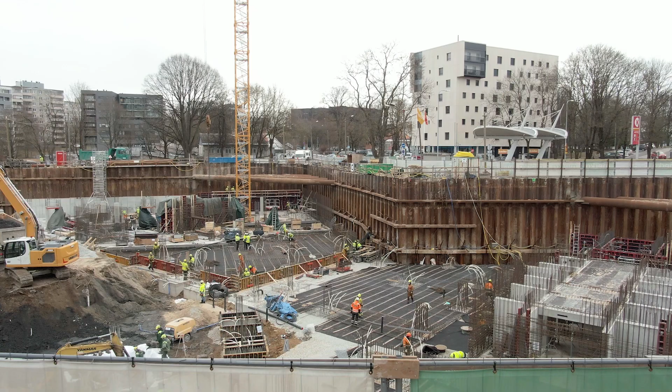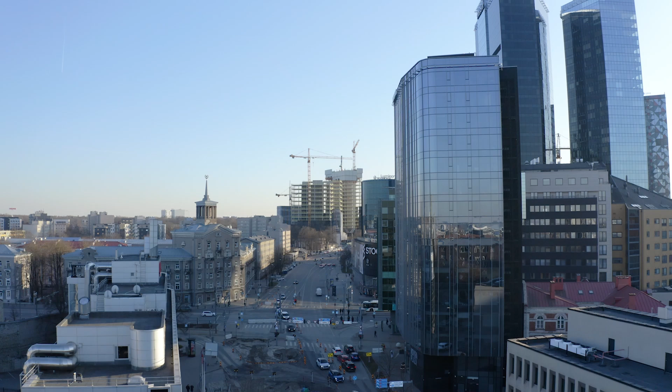Did you know that the construction industry, compared with other industries, has been one of the slowest at adopting innovation because of the characteristics of construction projects? First of all, construction projects involve a lot of different stakeholders: builders, subcontractors, suppliers, architects, homeowners. In addition to that, one of the influential parties is the local state, under whose regulation the whole construction needs to be done. There are a lot of rules in construction. On one hand, it can have an inhibiting effect on innovation, but on the other hand, it can lead to major changes.

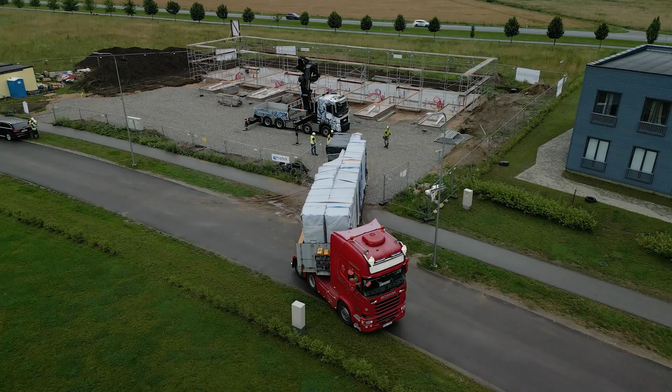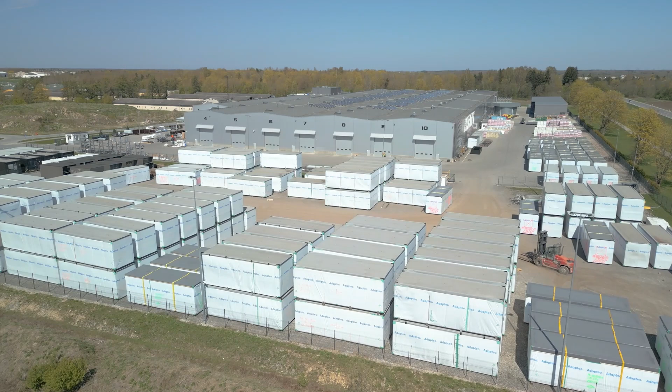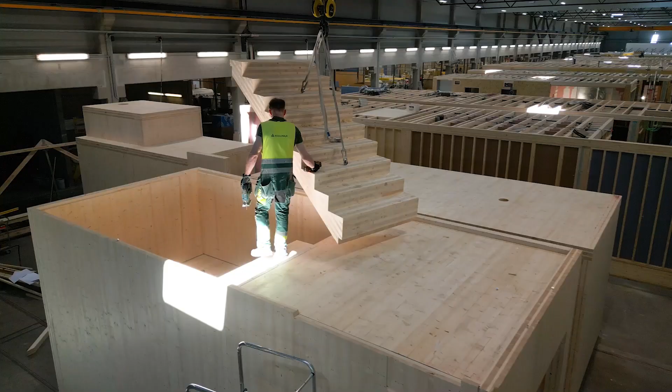Today we are witnessing the coming of a new construction era, where extensive changes have been happening due to technological developments and acknowledging the need for resource efficiency. While traditional construction involves assembling various materials on a building site, with workers engaged in numerous tasks such as laying bricks or installing windows, an alternative way is to build industrially. Industrial house manufacturing is similar to car manufacturing. All the house building components like walls, floors, and much more are produced in a factory rather than on-site.

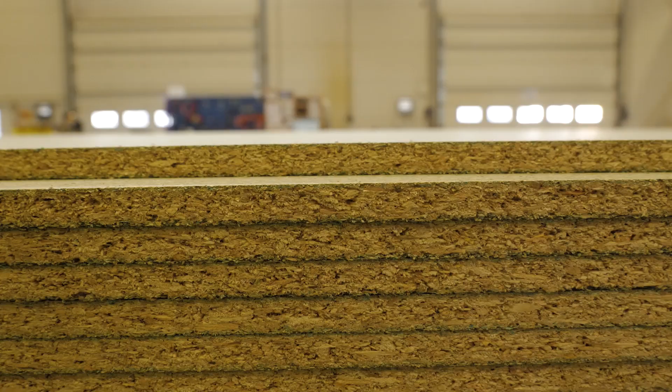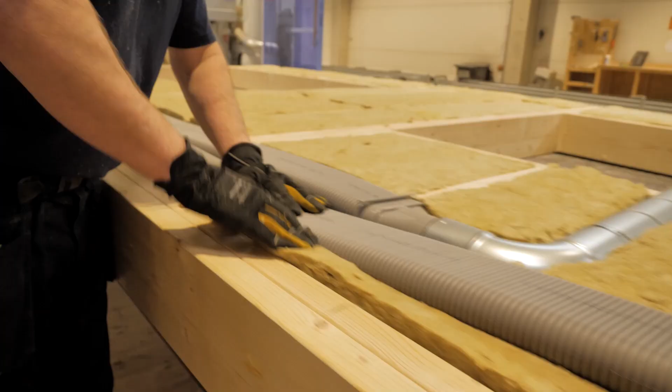This approach presents several benefits that make it an attractive choice in contemporary construction. Below, we explore more closely the key reasons why producing buildings in a factory is more reasonable and effective than conventional on-site construction. Industrial manufacturing, also called prefabrication, offers several significant advantages in terms of speed and quality, which are essential in construction practices. Factories provide a controlled environment where external factors like weather and temperature do not disrupt the construction process, as the works are happening indoors. This eliminates delays that might be caused by rain, snow, or extreme temperatures, which are common issues in traditional construction projects.

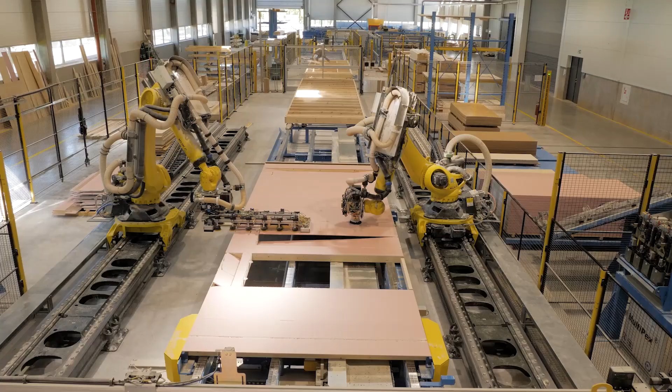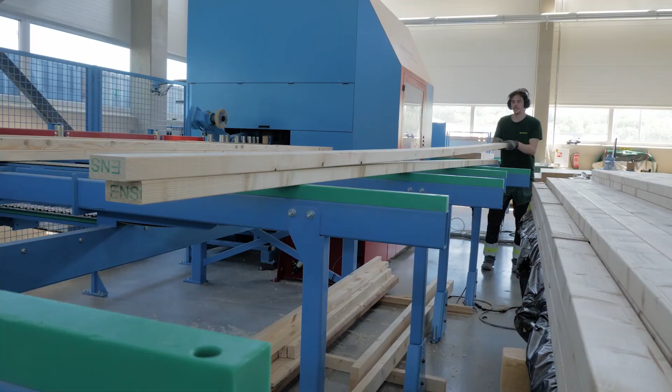The use of advanced machinery in factories allows tasks to be completed with a high degree of accuracy. This precision reduces the chances of errors that can occur on construction sites due to human factors, leading to a higher overall quality of the finished product. Moreover, components produced in a factory can be standardized, meaning they are made uniformly. Standardization helps to make quality more reliable as the components are made the same way every time. As well, uniformly produced components fit together easily, speeding up the building process since there's less room for errors.

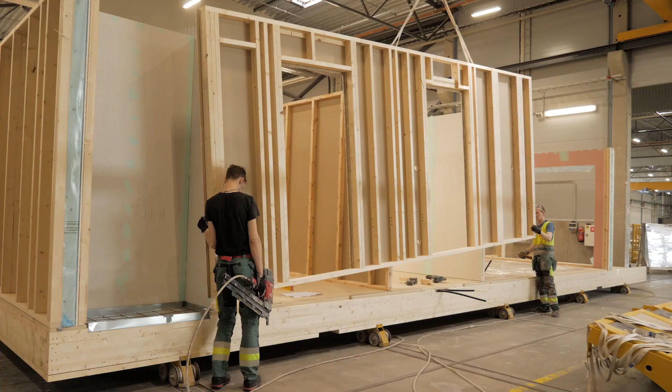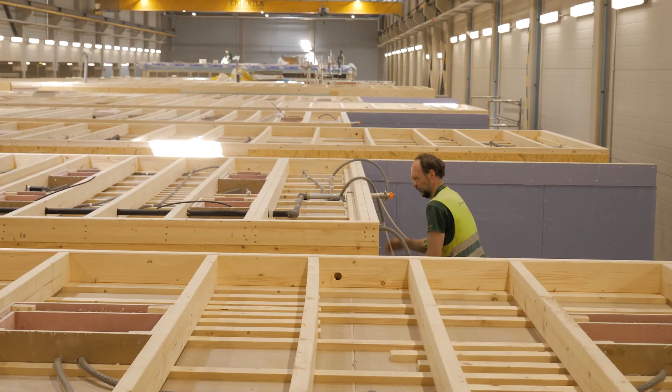Efficiency and speed are significantly improved in factory-based construction. Building houses in a factory environment can be much faster because multiple processes can happen at the same time. For example, while the wooden frame for a building is assembled, another element can be painted and another can be wired for electricity. Simultaneous work shortens the overall construction timeline. Factories are designed to optimize the flow of work. The movement of materials and the order of tasks are carefully planned to ensure maximum efficiency. This organized approach speeds up the construction process, resulting in a quicker and more reliable building method.

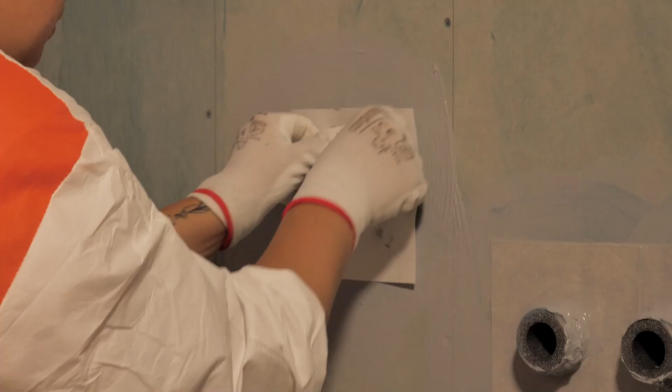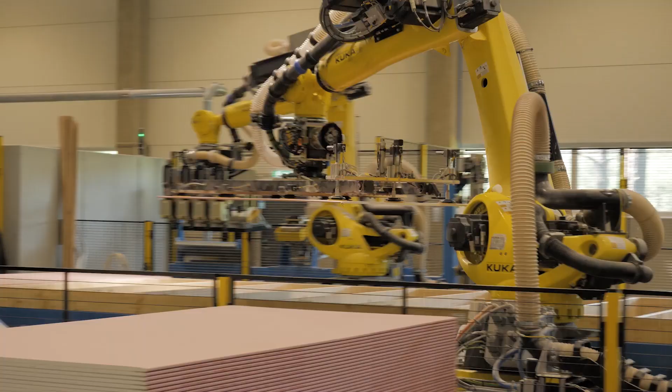Industrial manufacturing allows us to provide cost-effective solutions. With standardization, it's possible to cut costs not only in production, but also in design works. Automation also helps to raise the efficiency of factory production and reduce the need for workforce. Additionally, factories can purchase materials in bulk, making the final product more affordable. Furthermore, the precision with which materials are cut and assembled in a factory setting leads to significantly less waste, reducing costs and contributing to more sustainable construction.

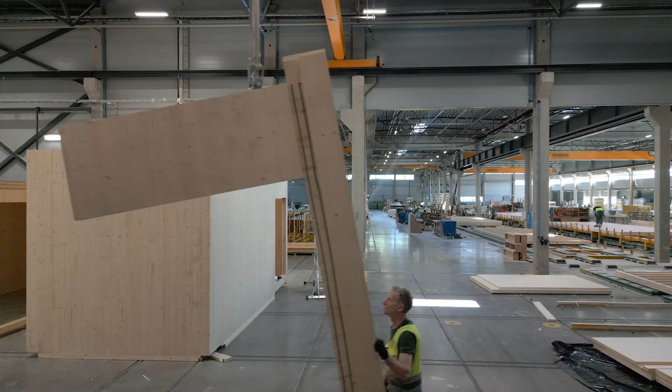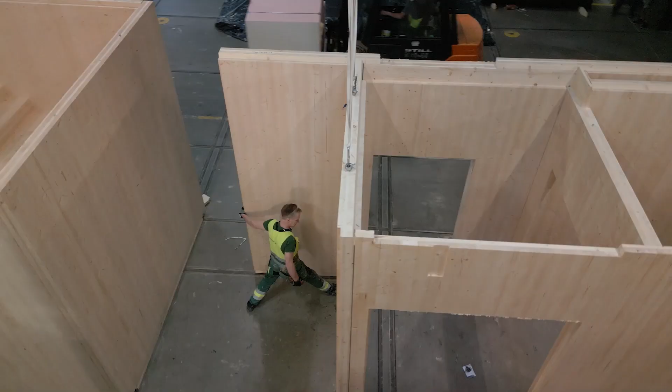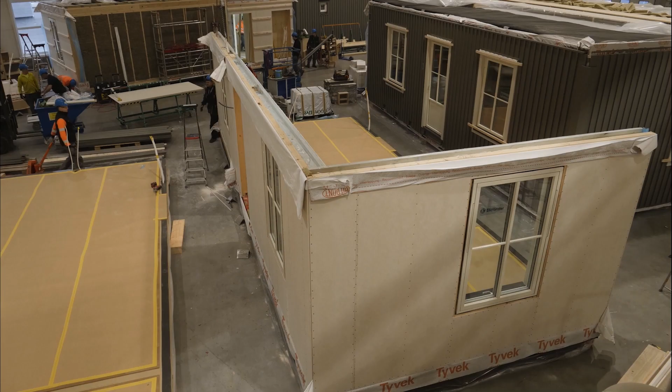Sustainability and environmental benefits are integral to modern construction practices. Houses produced in factories can be designed using advanced techniques and materials that enhance energy efficiency, leading to reduced overall energy consumption of the building. The centralization of production in factories also helps to lower the carbon footprint by minimizing the need for extensive transportation of materials and products. Moreover, factories are better equipped to manage waste efficiently, including recycling materials, contributing to a more sustainable and eco-friendly construction process.

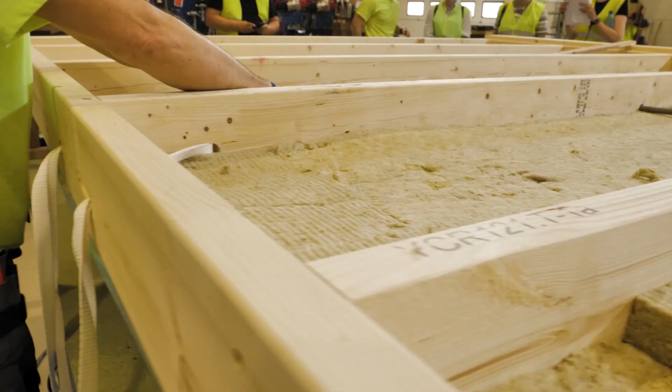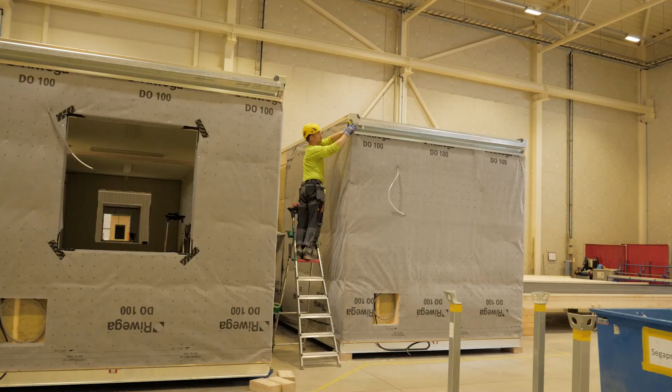Safety and working conditions are significantly improved in a factory setting, as there are fewer risks related to working at heights, handling heavy machinery, or dealing with unpredictable weather conditions. These factors are common hazards on construction sites, but are largely mitigated in a controlled factory environment. Prefabrication represents a significant shift in innovation in the construction industry, offering numerous advantages over traditional on-site building methods. The ability to produce homes with greater quality control, speed, cost-effectiveness, and sustainability makes this approach increasingly relevant in today's construction landscape.

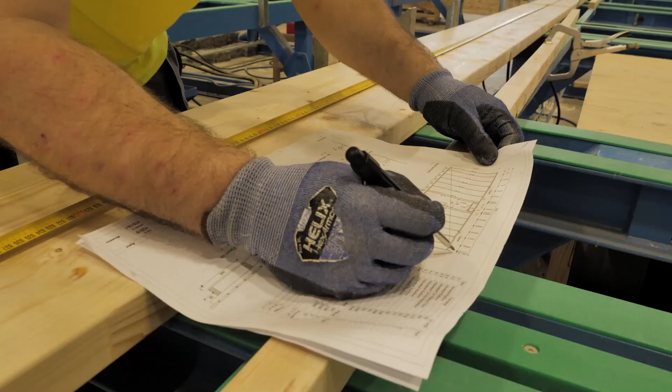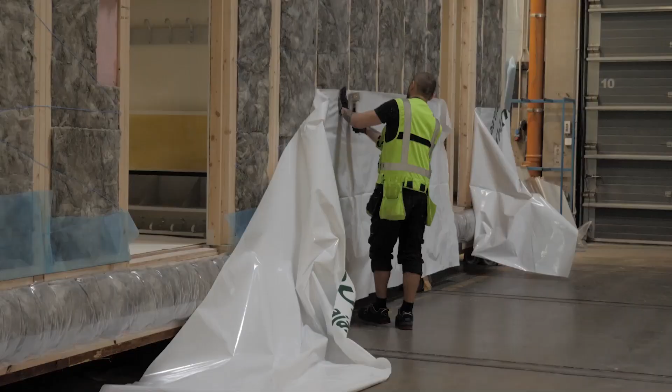In the world of construction, efficiency and speed are key factors. Let's compare how the industrial construction process differs from traditional on-site construction. In industrial construction, materials and products are first gathered and brought to a house factory. Then, the production process takes place. For example, a 6-story modular building with 60 apartments can be produced in just 1.5 months, with the modular units reaching up to 90% completion before being transported to the site. Once the factory work is done, the partially completed building is transported to the construction site. The erection of the building can be completed in just 4 months. In total, the industrial construction process for a 6-story modular building takes approximately 5.5 months.

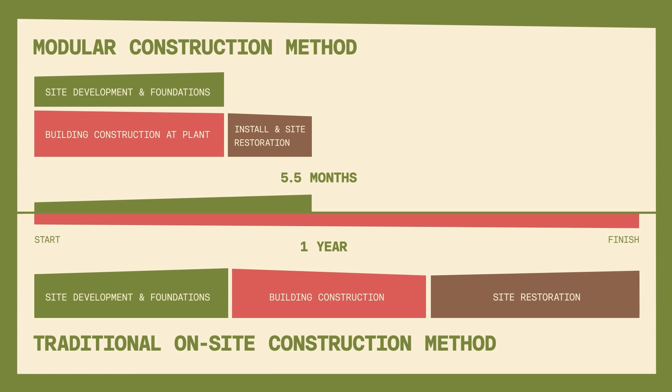When comparing it with traditional on-site construction, the entire construction process takes place on-site and requires a whole year from start to finish. As you can see, industrial construction, with its use of prefabrication in a factory, is much faster, sometimes even twice as fast when compared to traditional on-site construction. This is the reason why efficiency makes industrial construction an attractive option in the modern building industry.

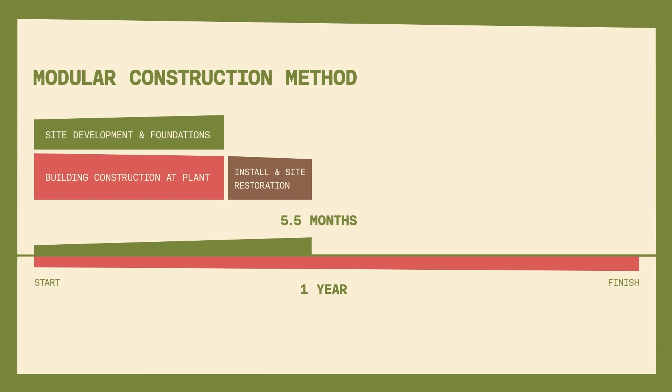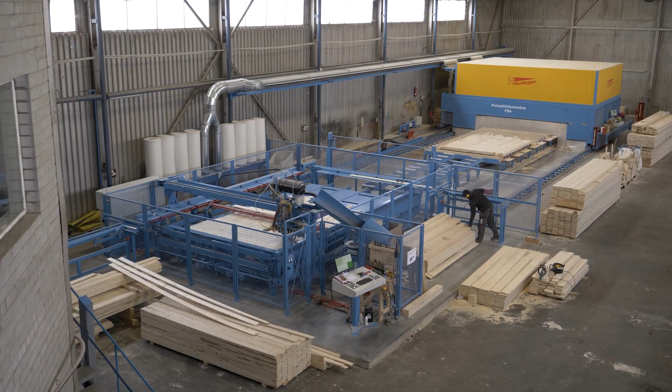House factories operate as complex ecosystems, where various departments and processes work together seamlessly to ensure the smooth production and delivery of building components. This integrated approach is necessary to meet the diverse demands of each project, from initial sales and estimation to final assembly, logistics, and warranty services.

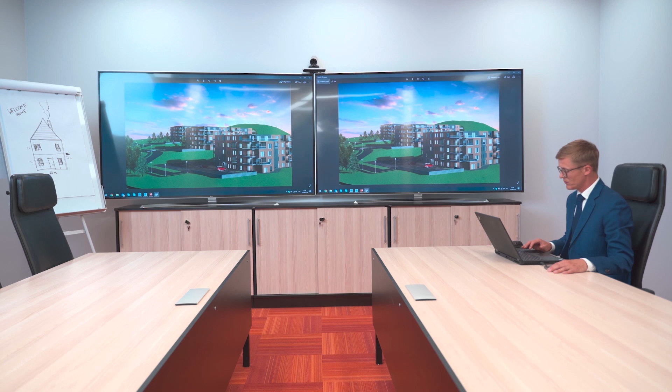By bringing together multiple disciplines such as design, procurement, production, quality control, and project management, house factories create a streamlined workflow that allows for efficient and high-quality production in a controlled environment. Each department and process within a house factory is interconnected, with the success of the entire operation depending on effective communication, precise planning, and coordinated execution.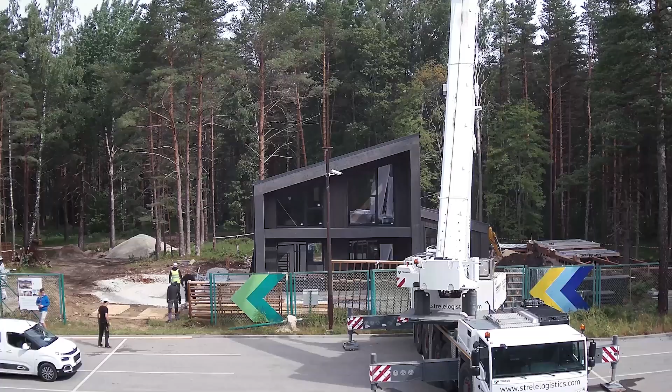For example, the project manager must work closely with procurement to ensure that all necessary project-specific materials are available on time, while the production team relies on accurate designs and material availability to produce components without delays. Meanwhile, project managers oversee the entire process, ensuring that every stage aligns with the project's scope, budget, and timeline.

This approach, supported by advanced technology and rigorous quality control measures, ensures that projects are delivered on time, within budget, and to the highest quality standards. It allows house factories to efficiently produce custom solutions tailored to specific client requirements. The ability to perform most of the construction in a factory setting, rather than on-site, minimizes risks, reduces waste, and improves overall efficiency. Prefabrication sets a high benchmark for sustainability, safety, and innovation in the construction industry.

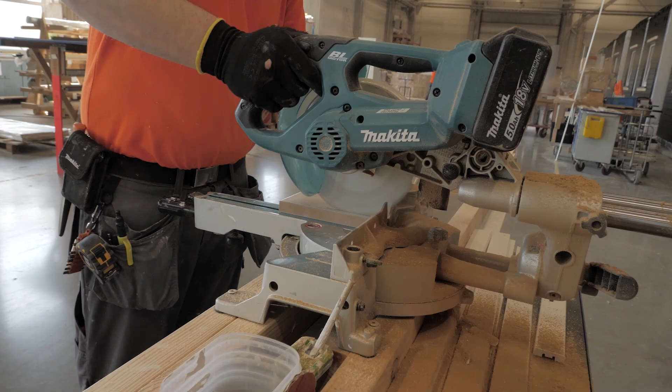The sales process in house factories serves as the foundation for successful project execution, establishing a clear understanding of the customer's needs and ensuring that the factory's resources are aligned to meet these requirements. This process involves several key stages, each of which is critical to accurately defining project scope, estimating costs, and preparing and signing contracts that set the project in motion. The sales process includes understanding the needs of customers, effectively communicating the benefits of the products, and negotiating terms that satisfy both the buyer and the seller.

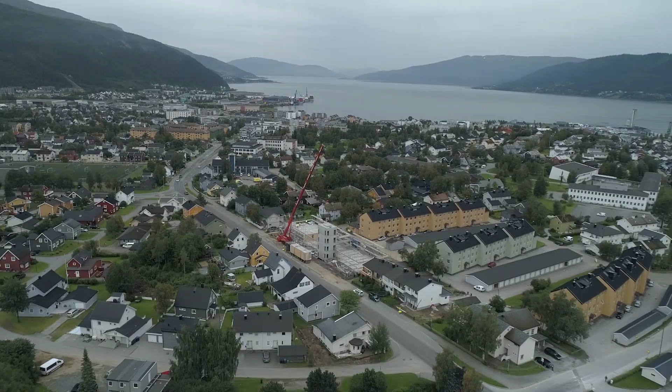The sales process begins with the initial customer engagement, where the sales team works closely with the potential client to understand their specific requirements, preferences, and project goals. This stage is crucial for gathering detailed information about the project. The sales team must identify any special considerations, such as local building regulations, environmental factors, or custom design features that may impact the project. After the initial consultation, a preliminary estimation and feasibility analysis is conducted.

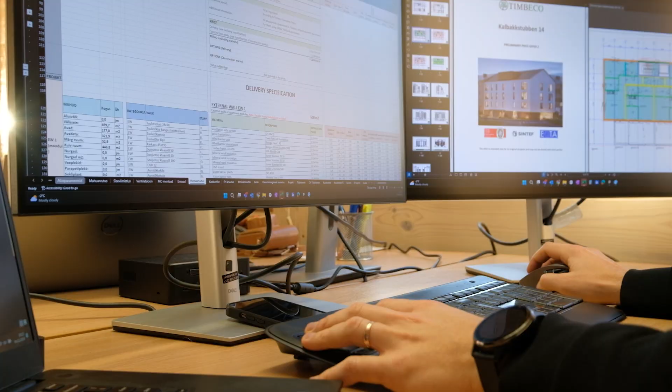During this phase, estimators collaborate with the design and procurement teams to develop a rough estimate of the project's costs, including material quantities, production time, and labor requirements. This also involves analyzing past projects, using pricing databases, and applying standard cost calculations based on the type and complexity of the project. Once the preliminary estimation is reviewed and refined, a detailed project proposal is prepared. This proposal includes a comprehensive breakdown of costs, timelines, and deliverables.

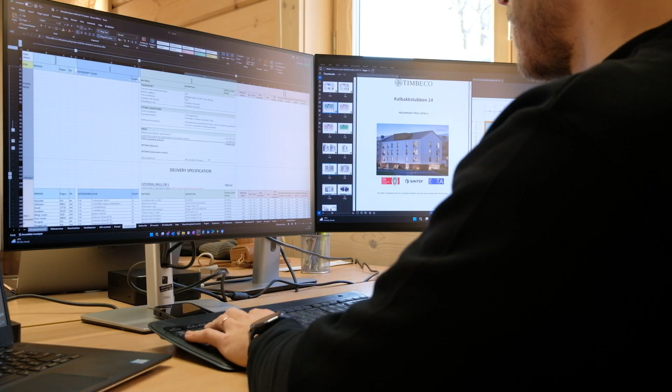It is developed in close cooperation with the design team to ensure that all technical specifications and design elements are accurately reflected in the cost estimation. During this stage, negotiations may take place to align the project scope and cost with the customer's budget and expectations. According to the final price offer, a sales contract is prepared. This contract outlines all the agreed-upon terms, including the scope of work, delivery schedules, payment terms, and warranties.

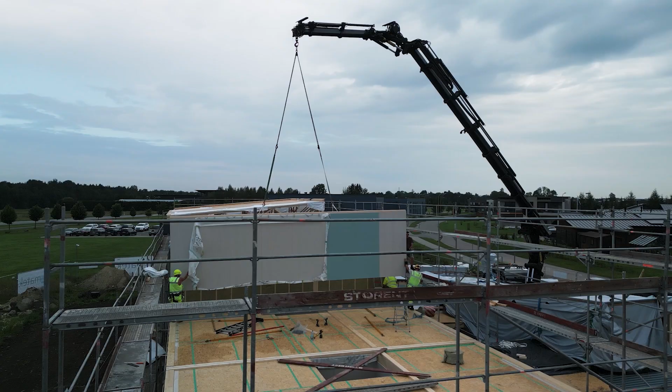It serves as a binding document that clearly defines the responsibilities and obligations of both the house factory and the customer. The sales contract also includes clauses related to potential changes in project scope, unforeseen circumstances, and dispute resolution mechanisms to protect both parties' interests.

Following the signing of the sales contract, a project handover meeting is conducted with the appointed project manager. This meeting involves the sales team, the project manager, and representatives from design, production, and procurement departments. The purpose is to ensure a smooth transition from the sales phase to the project execution phase. During the meeting, all critical aspects of the project are reviewed. The project manager, now responsible for the overall execution of the project, coordinates with all involved departments to ensure that the project progresses according to plan.

Project management in house factories involves overseeing the entire project from start until handing over the building's keys. Unlike traditional construction, much of the work in these projects is done off-site, in a factory, which requires careful coordination between the factory and the construction site to ensure everything aligns smoothly.

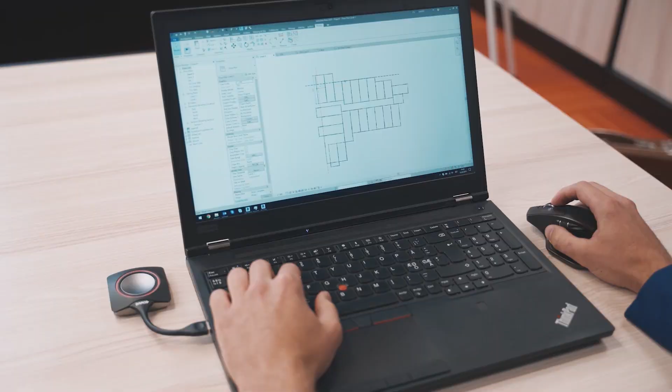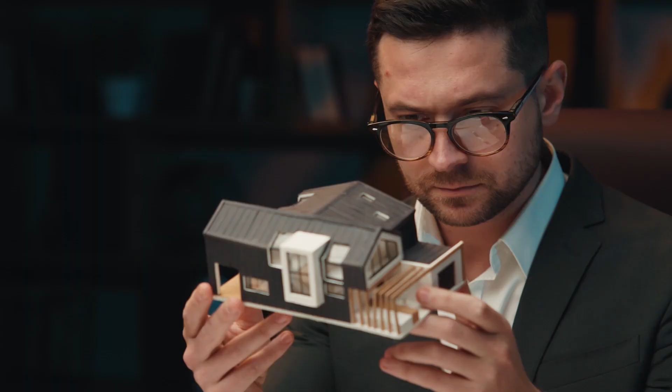The project manager acts as the primary liaison between various departments within the house factory, including design, procurement, production, and quality control. The project manager works closely with the design team to finalize the building designs based on customer specifications and regulatory requirements. For factory production, designs need to be finalized before production begins, as there's no room for adjustments once components are being manufactured.

This requires precise planning and communication by the project manager to ensure that all parties are involved, from designers to contractors. The project manager's work also includes collaborating with the production team and procurement team, as well as creating agreements with different counterparts and monitoring costs at every stage.

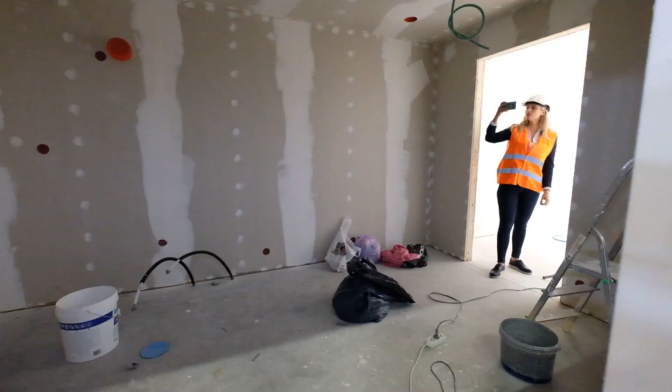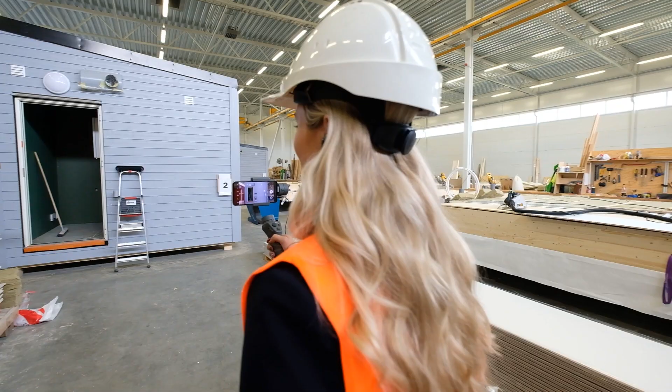Occasionally, the project manager is responsible for the procurement of project-based materials, and planning the procurement effectively is needed, as timely delivery of materials and works is crucial for keeping the project on track. Maintaining clear and consistent communication with the customer is a key responsibility of the project manager. This involves regular updates on project progress, addressing any questions or concerns, and managing expectations throughout the project lifecycle.

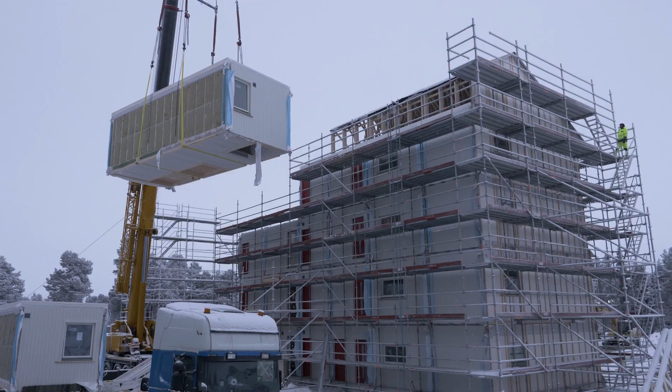Project management is about balancing the buyer's objectives and the factory's obligations. In addition, as the majority of the buildings are built in different regions, it requires a constant overview of local regulations and demands to meet them properly. Clear communication and coordination throughout the project is essential to ensure successful completion of every stage of the project.

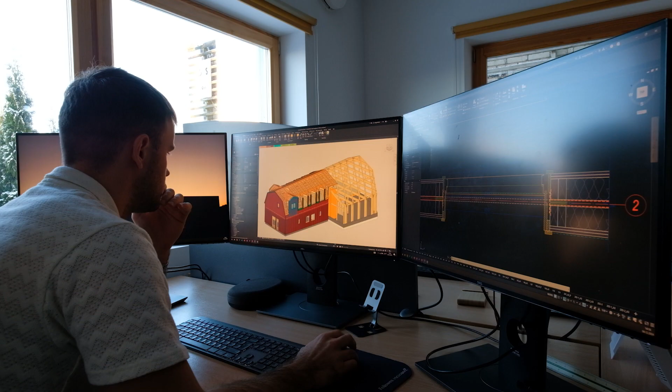After the contract is signed, work related to designing the building's structural elements, assembling units, and handling complementary tasks like electrical work, water, heating, and ventilation starts. To make sure the structure is safe and stable, engineers perform calculations to check loads and stresses. As well, fire modeling is made so that the building meets all the demands from a fire safety perspective.

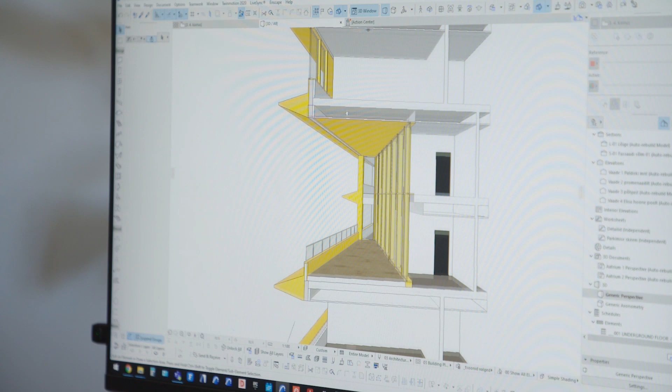The design process mainly relies on a 3D structural model, while creating a building information modeling, also called BIM model. A BIM model is a digital representation of the physical and functional characteristics of a building, which includes important material and technical details. Although 2D software can be used, it doesn't easily transfer data to the next production step. Detailed drawings and sketches are crucial to ensure the components are produced and assembled correctly.

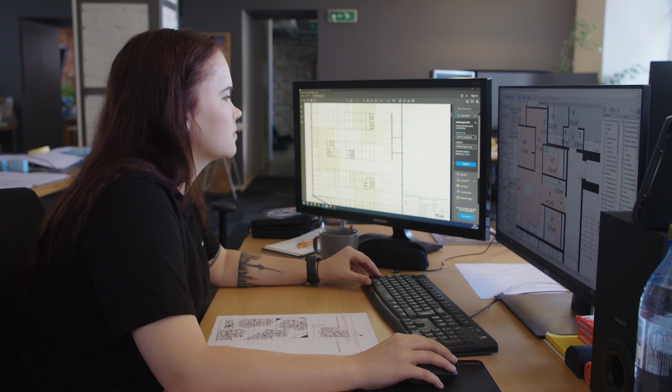The level of the design detail depends on the factory. The standard structural solutions are usually described in work instructions and not duplicated in the production drawings. In more automated factories, drawings according to 3D modeling are exported to computer-controlled machines, although some tasks may still rely on separate drawings. Any design changes must be finalized before production, as modifications are not feasible once components are being fabricated.

The production process in house factories involves transforming raw materials into finished building products through a series of carefully planned stages. It starts with planning, where the design and resources required for production are determined. This stage ensures that both planar elements, like walls, floors, and ceilings, and volumetric elements, such as nearly complete rooms, fit together perfectly at the appointed time and meet customer requirements. Detailed planning also sets the schedule and material needs for the project.

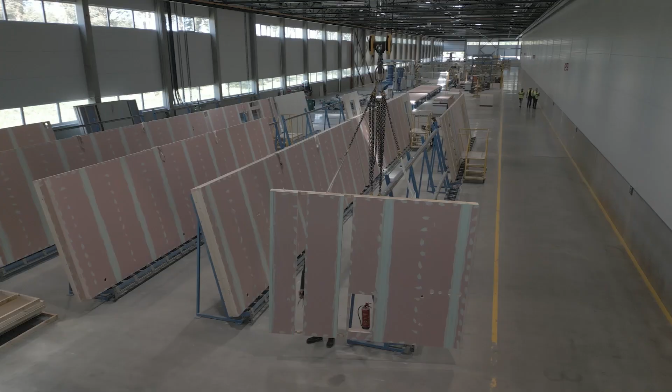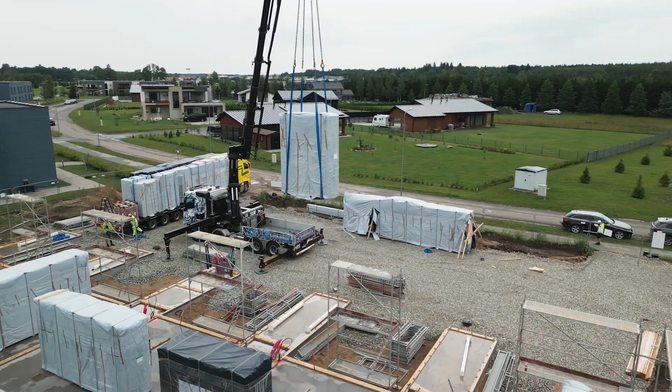The manufacturing stage is where the actual production takes place. Here, raw materials are converted into finished products, with flat planar elements and volumetric elements being produced under controlled conditions. Planar elements are standard components like walls, while volumetric elements are larger, more complete assemblies. These elements are designed for quick assembly at the construction site, minimizing construction time and risks.

After manufacturing, the products are stored until they are ready for transportation. Efficient storage is essential to protect the products and maintain the overall efficiency of the supply chain. Quality control in house factories is a systematic process designed to ensure that every component and final product meets specific safety, durability, and performance standards.

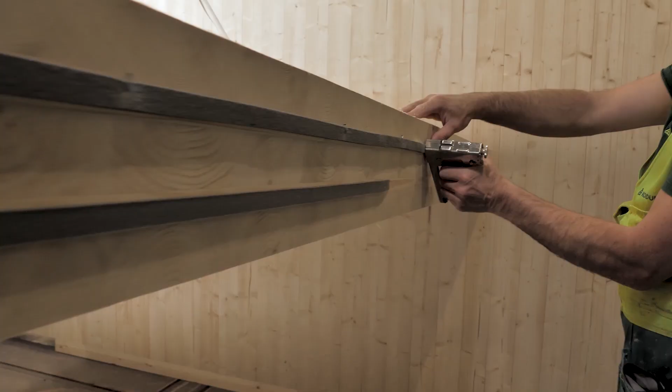The process begins with the inspection of raw materials as they arrive at the factory. Each batch of materials, such as wood, boards, and windows, is checked for quality defects like warping, impurities, or inconsistencies. Ensuring high-quality materials from the start is crucial to avoid issues in the later stages of construction. As the production process begins, in-process quality checks are performed at every stage of production.

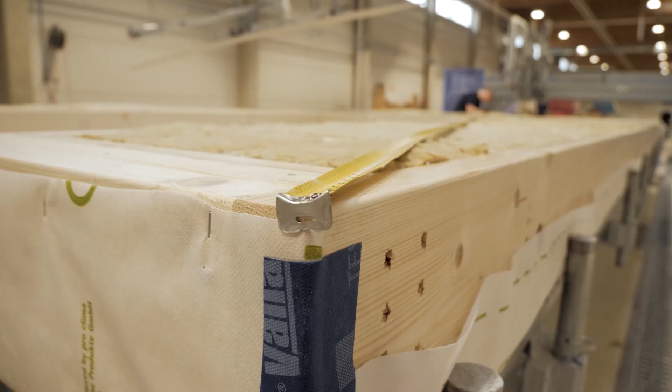During assembly, workers monitor each step, from framing to finishing. These checks involve measuring dimensions, verifying alignments, and ensuring that every component fits together precisely according to the design specifications. This stage is critical because it allows for the early identification of errors or defects, which can be corrected before they affect the entire building.

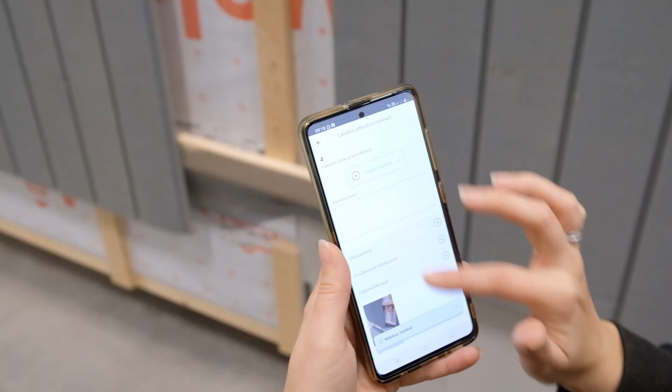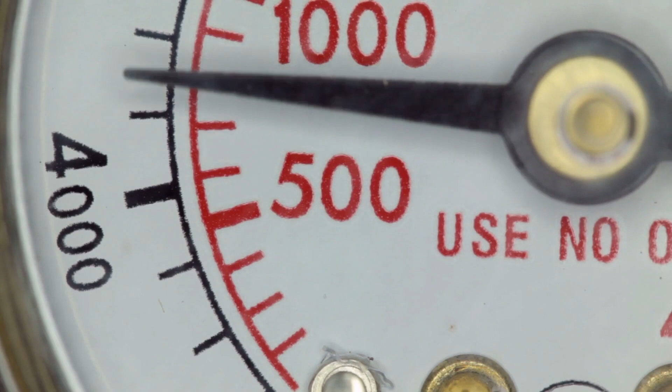Once the individual modules or components are assembled, a final inspection is conducted to assess the overall quality of the product. This comprehensive inspection ensures that the product meets all design and safety standards before it leaves the factory. In addition to visual and structural inspections, performance testing is often conducted to simulate real-world conditions. This can include air tightness tests, water leakage checks, and electrical safety verifications. These tests help ensure that the house will function effectively and safely once it is installed on-site.

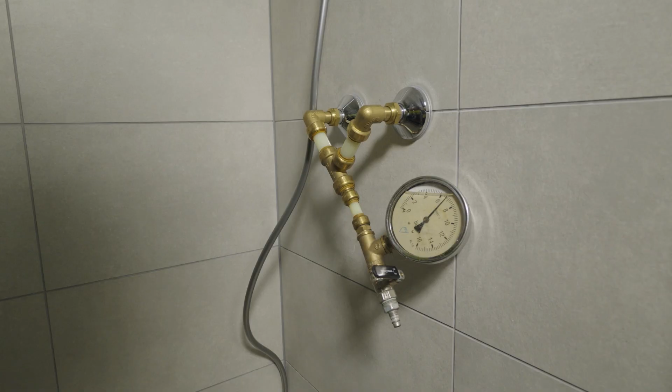Quality control in house factories is essential for maintaining the consistency, safety, and reliability of prefabricated homes, helping manufacturers deliver high-quality products that meet customer expectations and regulatory requirements.

Logistics in a house factory is a crucial operation, involving the careful planning and management of materials as they move through the factory, from arrival to processing and final shipment. The factory is essentially a large logistics system where materials come in, go through various processes, and are eventually turned into end products that are shipped out.

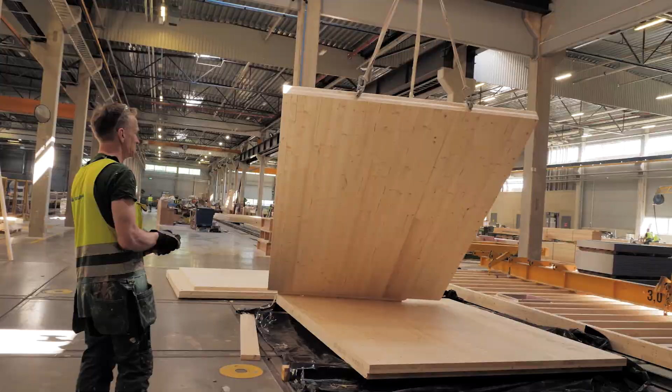The efficient planning and optimization of material flow and storage are central to the factory's operation, as they directly impact the factory's effectiveness compared to traditional on-site construction. Logistics influence every aspect of factory design and operation. The goal is to minimize the movement and storage of products to increase efficiency.

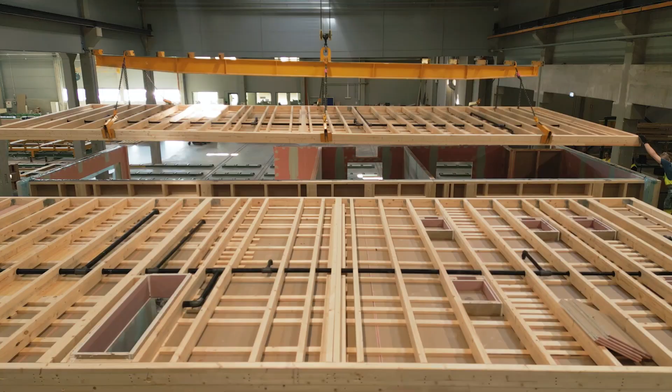The layout of workstations, storage areas, and the distance materials must travel between them are all optimized to reduce time and effort. For instance, some transfers may be quick and straightforward along a production line, while others may require more complex equipment like bridge lifts or forklifts.

Decisions about how much material to keep in stock depend on supply chain. Keeping too much material increases storage costs and the risk of damage, while keeping too little could halt production. Efficient logistics reduce the time materials spend in storage and on the production line, which lowers operational costs and speeds up product delivery to customers.

Logistics is divided into 4 key areas: incoming materials, internal logistics within the factory, delivery logistics for finished goods, and storage. For incoming materials, logistics consider factors like how goods are unloaded and where they are placed. Different products have specific storage requirements, such as protection from moisture, which is a major risk in material handling.

Internal logistics manage how materials move within the factory. In production lines, like those for wall elements, materials are processed and assembled in a sequence that keeps production flowing smoothly. The work is often organized into specific time cycles, where each task must be completed within a set period to keep the line moving efficiently.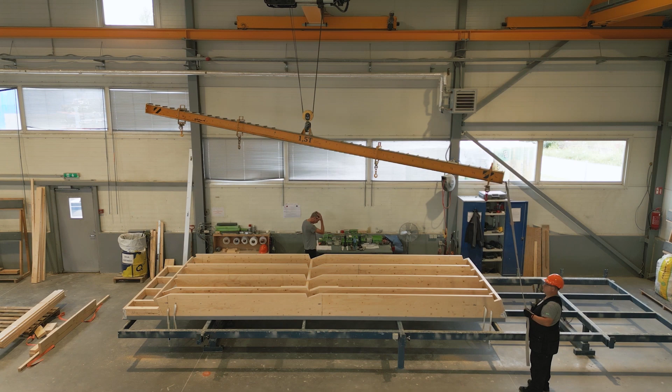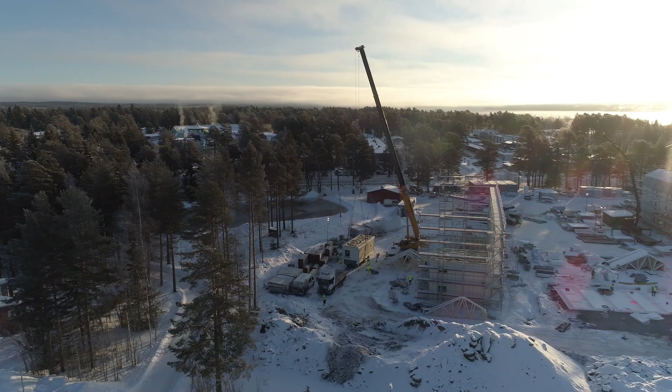For delivery logistics, planning focuses on how finished products are transported to their destinations. Larger elements, like modules, require special transport arrangements, including permits and protection during transportation. It's also important to account for risks such as weather damage or condensation inside the packaging, which could occur during transport and storage.

In essence, the factory's logistics system is designed to streamline the entire manufacturing process, reduce costs, and ensure the timely delivery of high-quality products to customers.

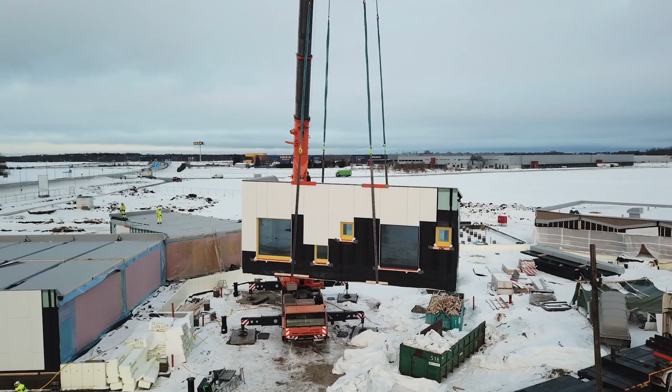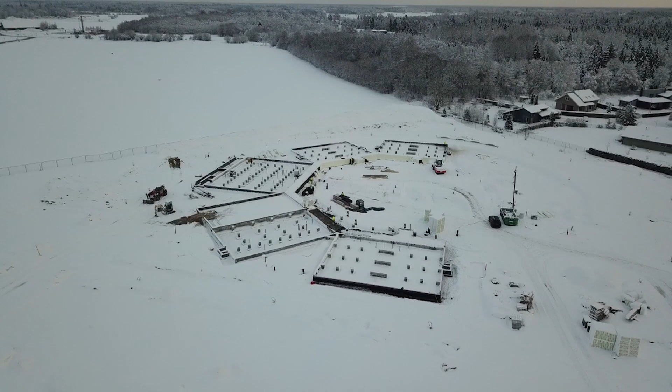The erection process on a construction site involves a carefully coordinated effort between various teams to ensure that prefabricated elements or modules are installed correctly and safely. Before installation begins, the site needs to plan how the elements or modules will be received, where they might be stored temporarily, when scaffoldings need to be installed, and how and where the lifting will be done. This planning includes creating a detailed site layout that considers the location of cranes, lifting methods, and necessary safety precautions.

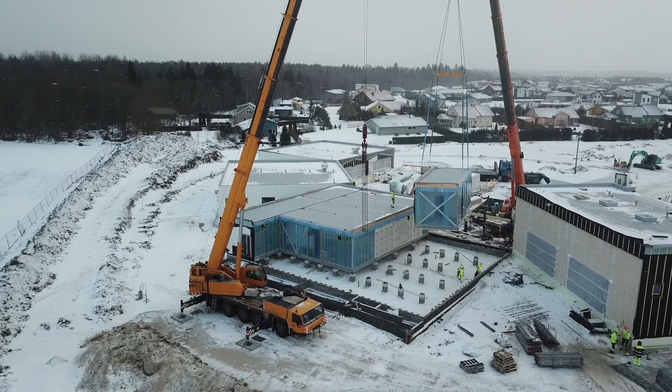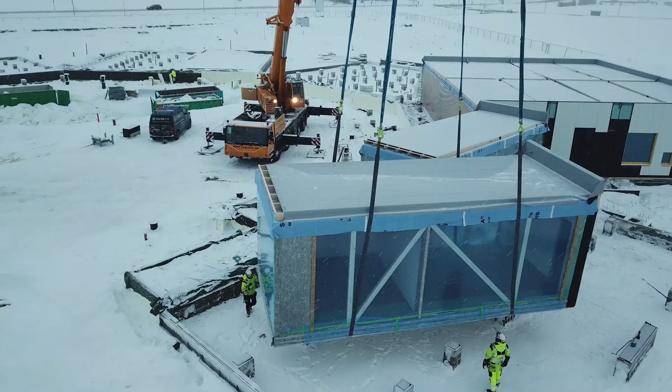Choosing the right crane involves evaluating its lifting capacity and reach, and selecting the appropriate lifting methods, such as straps or attachment points specific to each element. Safety is the most important during the lifting process. Workers must ensure that no one is beneath the lifted elements, that the fastening straps are undamaged, and lifting hooks are securely attached. All personnel must use appropriate safety gear.

Coordination between the site management and installation team is essential, with agreements made regarding the use of site facilities such as restrooms, power sources, and waste disposal. Installers must adhere to site rules and safety protocols, including orientations and the use of required safety gear.

The installation of wooden elements is managed by the site manager or installation foreman, who ensures that elements are placed in the correct order, connections are securely fastened, and the work is carried out safely. The foreman addresses any issues during installation and liaises with the broader site team to keep the process running smoothly.

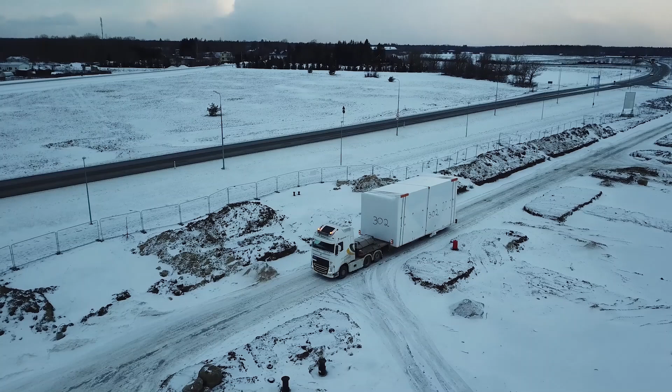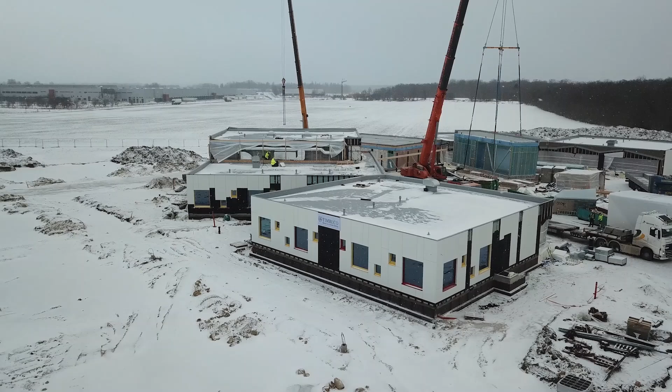Planning for transportation is another crucial element of the process, as large trucks carrying the prefabricated components often face restrictions in navigating the site. Detailed route planning is necessary to avoid unsuitable areas such as soft ground or tight turns. Moisture protection management is critical during the erection process. Some elements cannot be installed in rainy conditions, so weather monitoring is necessary. Protective measures, such as using tents, may be required to shield the elements during installation and after.

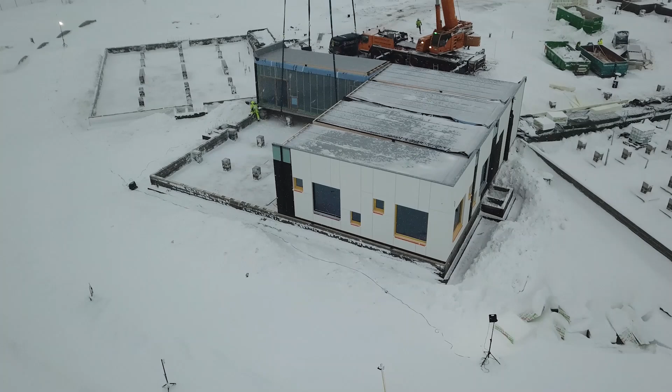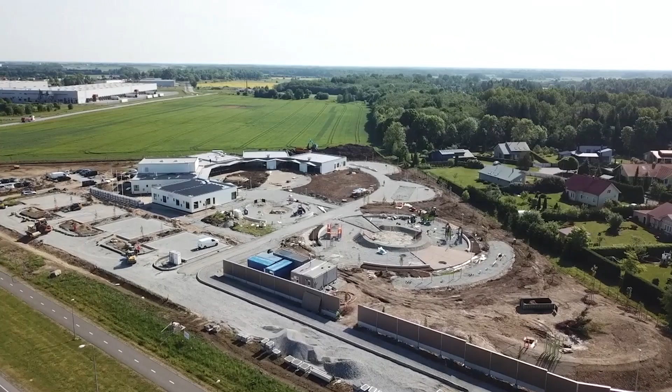The order of installation is thoroughly planned, with specific sequences required to secure connections and attach elements properly. Installers must adhere to precise tolerances, ensuring that all measurements are accurate and connections are correctly executed. Quality control during the erection process includes photographing hidden structures, documenting installation tolerances, and confirming that all elements meet specified standards.

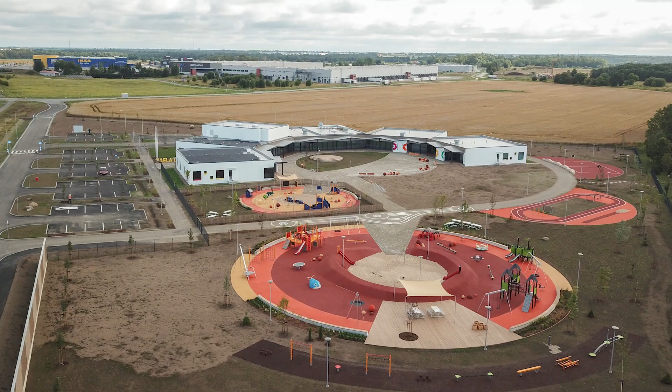Post-installation, the site must be cleaned, weather protections must be maintained, and additional tasks such as sealing and finishing of interior and exterior surfaces are completed. This thorough and detailed process ensures that the building is not only constructed efficiently, but also meets high standards of quality and safety.

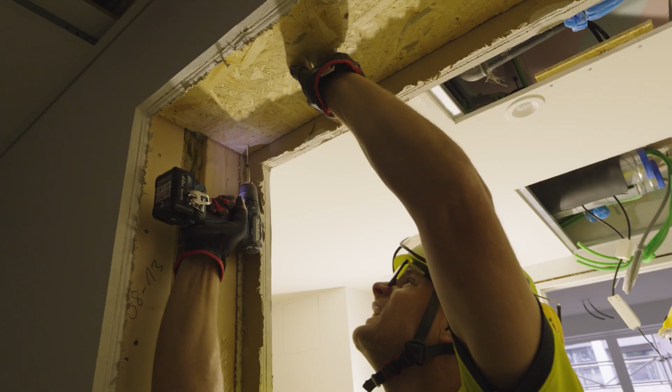Factories offer a comprehensive warranty on all their wooden elements, reflecting their confidence in the quality and durability of their products. This warranty covers defects in materials and workmanship under normal use and conditions. Should any issues arise, customers can contact a general contractor for assessment and resolution, which may include repair, replacement, or refund, depending on the nature of the defect. The warranty underscores a factory's commitment to customer satisfaction and long-term reliability of its products.